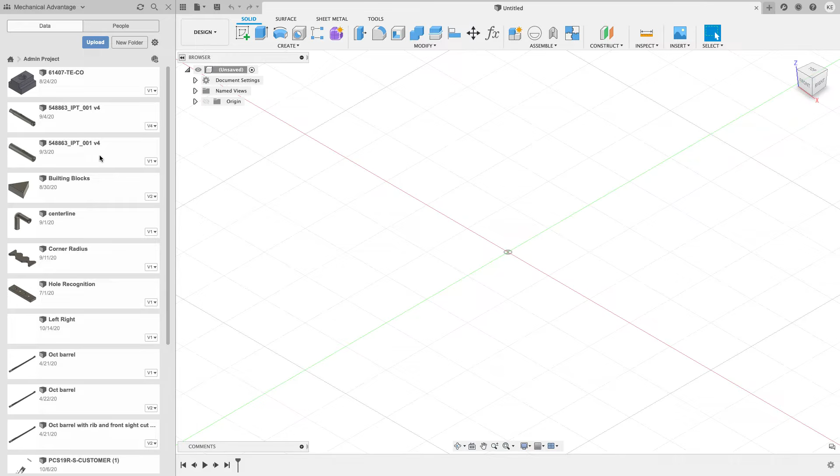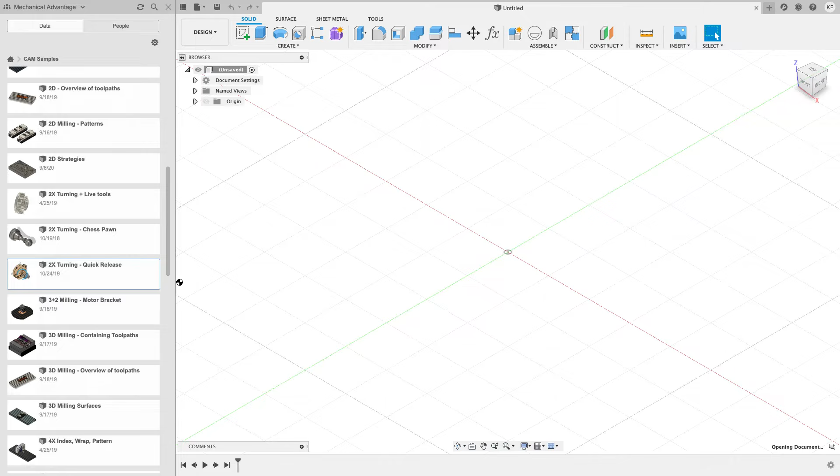To do this, we're going to use a tutorial file that Autodesk has supplied with Fusion. To get to that tutorial file, I'm currently in a project. I'll click on the Home button, scroll all the way down until I find the samples directory, and inside samples there's a CAM samples folder. I'll double click on that folder, scroll down a bit more until I find a file called 2x turning quick release, and either double click on it or right click and choose open. Fusion will go ahead and open that file for me.

Once I get the file open, I can close my data panel since I don't need it anymore. We open this up, we can see the part, we can see it set inside a chuck, and we're ready to go ahead and add some toolpaths.

Now this part already has a setup and toolpaths added to it. We're not going to use these. You can minimize them, or I'm just going to right click on this setup and delete it altogether.

Now you could also go up to file and choose save as, give this a name and choose what project you want it to go to so it saves to your directory. I'm going to hit cancel, and you'll note you can't hit the save button—this is currently read-only, so you can't change this file once you open it up.

Once you have your file saved to your location, we're ready to make a setup. From the setup panel, I'm going to choose the setup command, and our setup will pop up. If we look under operation type, we're set to milling, but we're going to do a turning part here, so I'll hit the drop down and choose turning or mill turn.

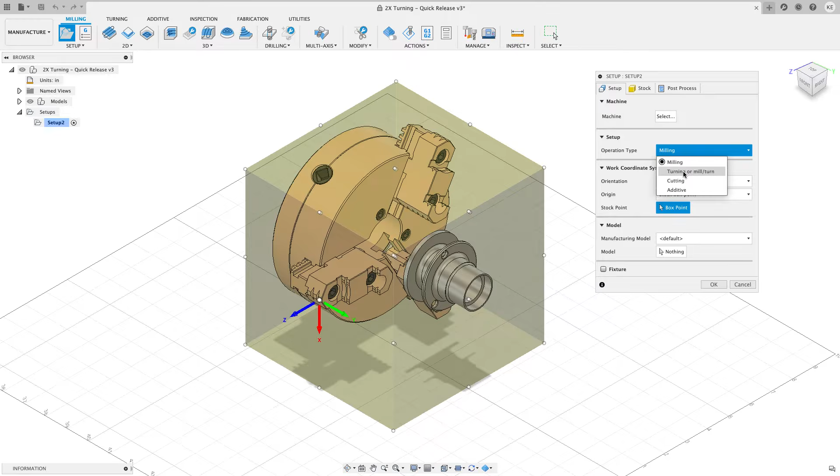When I do that, the axis shifts a little bit, but Fusion isn't quite sure where my center of rotation is going to be. It's looking for a Z axis, so I can click on any round face—I'll just go ahead and click on that face right there. It doesn't really matter which one you choose. Now you can see my Z axis is lined up with the axis of my part.

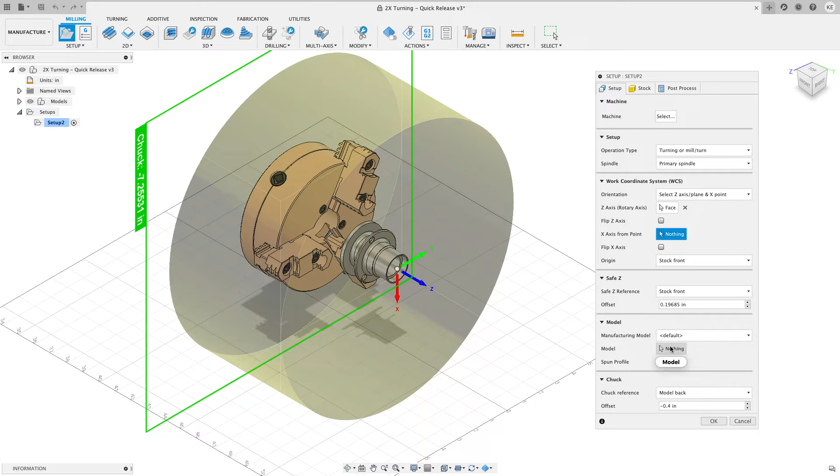I also have to tell Fusion which model it is that I want to machine in this case. So where it says model nothing, I'll just go ahead and click on the model itself, and that gets me oriented that way. Now I can see that I have the stock on my part, and I'm going to make a few more adjustments to it, but for the most part we're making some progress here.

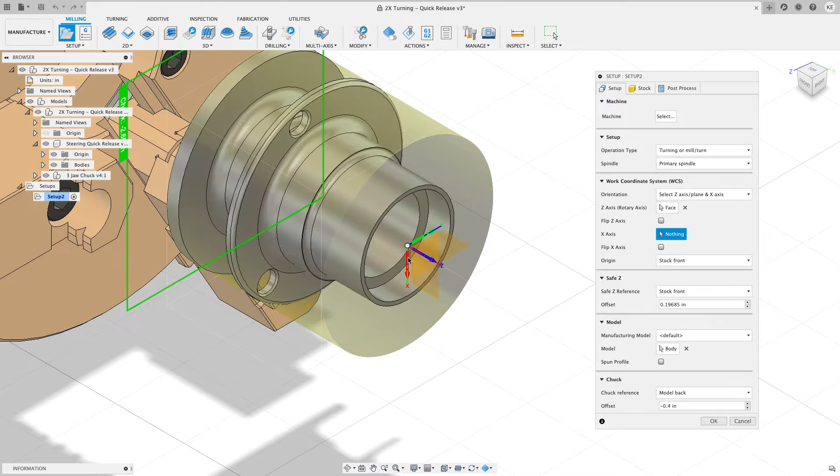I don't like the way this x-axis is facing. I want the x to face away from me, y to come up, and z to run down the center line of the part. To fix the x-axis, I'll expand out my models, my design, and then my steering quick release, and turn the origin on. Now I can go click on the base of the X arrow and click on this plane, and I have my x-axis now perpendicular to that plane, facing the way I want it to.

So I can turn my origin back off so I don't have to see that, and minimize this stuff one more time. I'm pretty happy with my outcome there. I'm going to go set my stock diameters now—I'll do a fixed size cylinder for this, and my stock diameter is going to be 2.75.

And the length for this is going to be 3.5 inches. So I'll type in 3.5. And when I look at this, Fusion puts some of that stock in front and some of it in the back. I really just want most of it to hang on to.

So what I could do is change my model position to offset from front, and I'm going to do an offset amount of 100 thousandths of an inch, or 0.1, so we can come back and face that off. And now you can see I've got more material behind it to be held onto, and not as much to face off in the front.

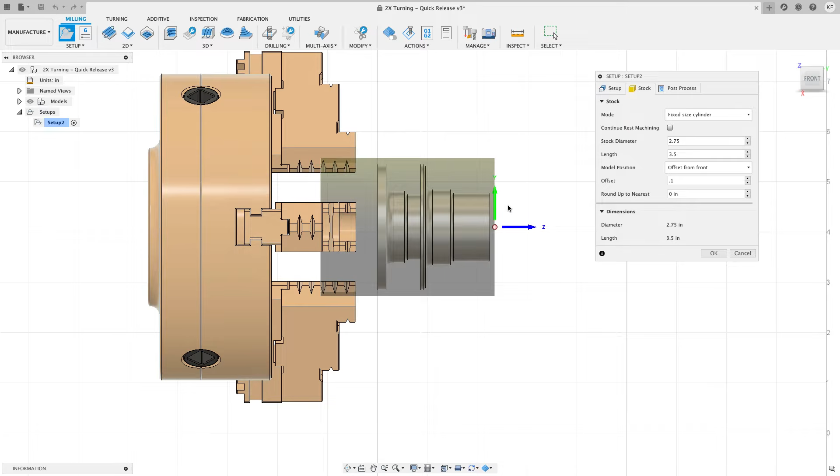And I should be good to go on my setup, and I'm going to go ahead and choose OK. So I've got my setup created. We're ready to go and start adding some toolpaths, and we're going to start by facing this part off.

I should also note that this tutorial is meant to help you get started using toolpaths inside of Fusion 360 when doing lathe parts. This isn't going to be a complete comprehensive deep dive into every option of every toolpath that I show in this. So I might dive into a few options here and there, but we're not going to cover every single option in every toolpath that we go through and look at.

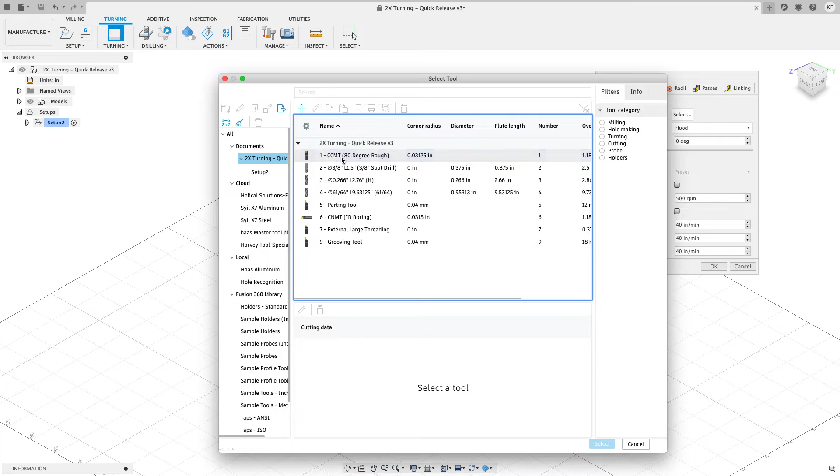So like I said, we're going to face this part. So I'm going to go to the turning menu and hit the drop down and choose face. And I'm going to go select a tool. Now this file, this 2x turning file, does have tools associated with it, and we're going to use these tools to start out with. So I'm going to start out by grabbing tool number 1, the CCMT 80 degree rougher.

I'm going to go ahead and select that, and then it may sound sort of funny, but every toolpath that I'm going to show you how to do inside of this, once I select the tool that I want to cut with, I'm just going to hit the OK button and see what I get.

So in this case, I get a facing toolpath, and if I simulate this, maybe we'll slow this down a touch, what we'll see is Fusion just goes and faces that front off of the part. And it took a 100 thousandths-inch cut off there, and maybe that's too much. So maybe what we could do is edit this.

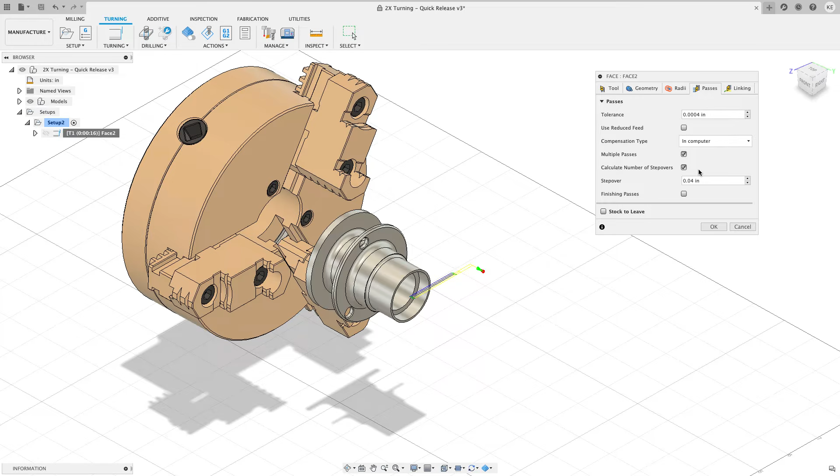We could go over to the Passes tab, and now I could turn on multiple passes, and I'm going to set my pass to be 50 thousandths or 0.05 per pass, and then hit OK. And let's see how that changed it. Now when I simulate it, again, we'll slow it down just a little bit. It's going to go through and take its first pass. It's going to come back, and it's going to do a second pass, and it cleans up to that green face.

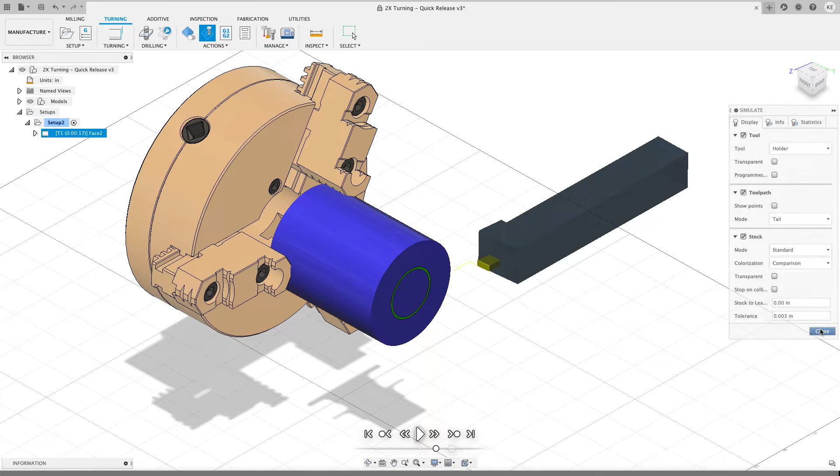I've got my simulation set to comparison. So anything that's blue is remaining stock, and anything that's green is finished stock. And we'll go ahead and close that. So that's our facing toolpath.

Now let's go and work on profiling the outside of this. We're going to do a roughing profile toolpath for that. So I'm going to go up to the turning menu and choose turning profile roughing. I'm going to go and select the tool. In this case, it's already going to use the one that I want. It's already pre-selected. And now I'm just going to choose OK and see what I get for toolpath.

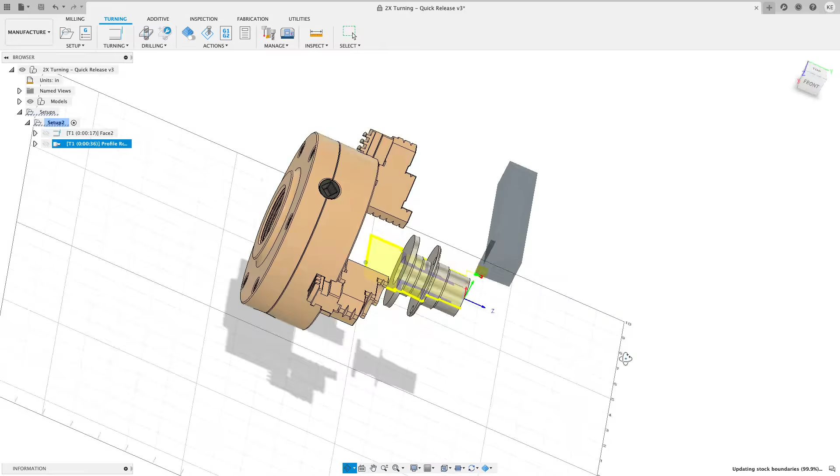So we'll look at this from the top view here, and we can see that we have some toolpaths going across this part. And we can kind of evaluate the toolpaths, see what it is that we like and what we don't like. And I can see a few things that I don't like.

I'd like this toolpath to cut farther past the back, so when I part this off, I don't have to go through as much material. I also don't like how it's diving down here. And maybe we'd want to change the amount of step down we do here, things like that, make it extend out farther. So let's go look at some of those different options.

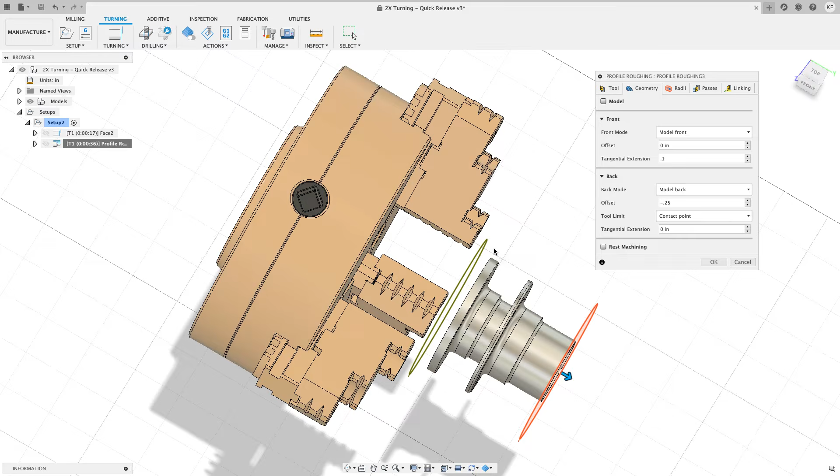I'm going to edit this toolpath, and one of the first things I want to do is on the geometry, I want to extend it where it goes and cuts. So from the front, I'm going to give it a 100 thousandths of an inch tangential extension. And on the model back, I'm going to give it an offset here. So I'm going to say minus 0.25, and there you can see that preview is showing me where it's going to cut to, and I'll hit OK and see what I get.

And now when we look at this toolpath, it starts cutting out farther, and it's cutting farther past the back, still away from my jaws, but you can see how it's diving in both of these areas. So maybe we could go and look at how we could make it stop diving in like that.

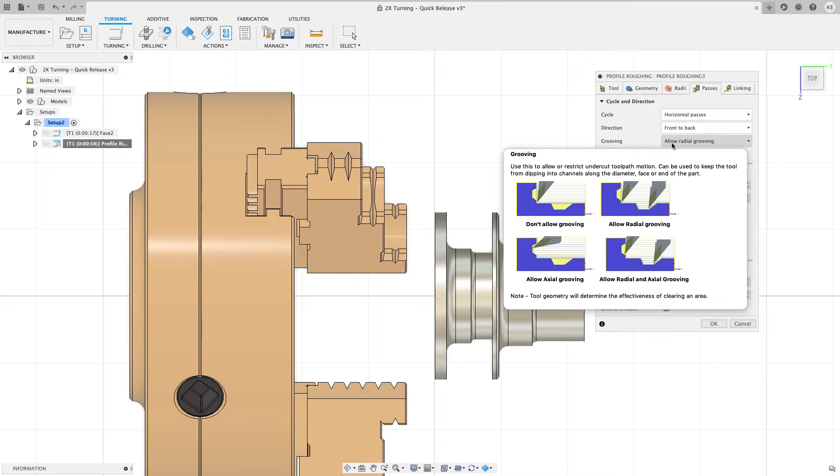I'm going to edit this toolpath, and that's going to be controlled on the Passes tab, and it's going to be something called grooving. So right now it's allowed to groove radially. If you look at the tooltip here, I think it's pretty self-explanatory. I'm going to hit the drop down and say don't allow grooving. And now when I hit OK, Fusion's just going to go and do straight toolpaths across. We're cutting past the back, getting pretty much what I want right here.

So maybe one other change I might want to make is on the Passes tab. Maybe I want this to do a deeper step down per pass. So it's currently 50 thousandths of an inch. Let's make it 150 thousandths of an inch just so you can see the difference, and we'll hit OK. And now you can see that we have fewer roughing passes going across there. So you can control the step down of your tool that way. So I've got that taken care of.

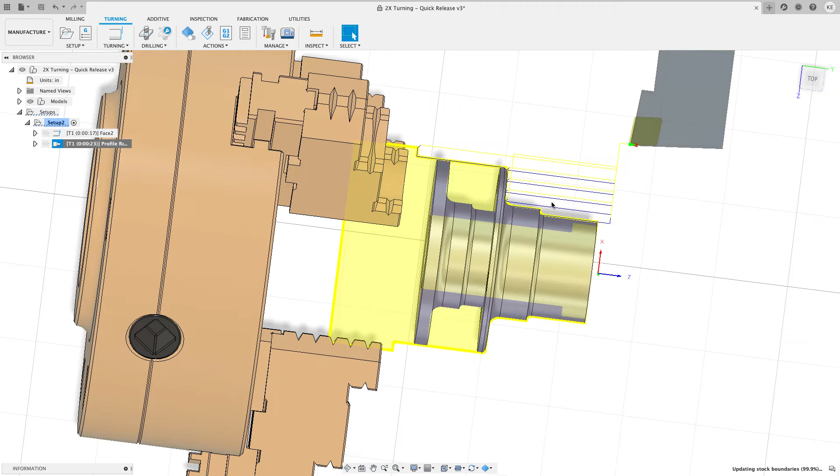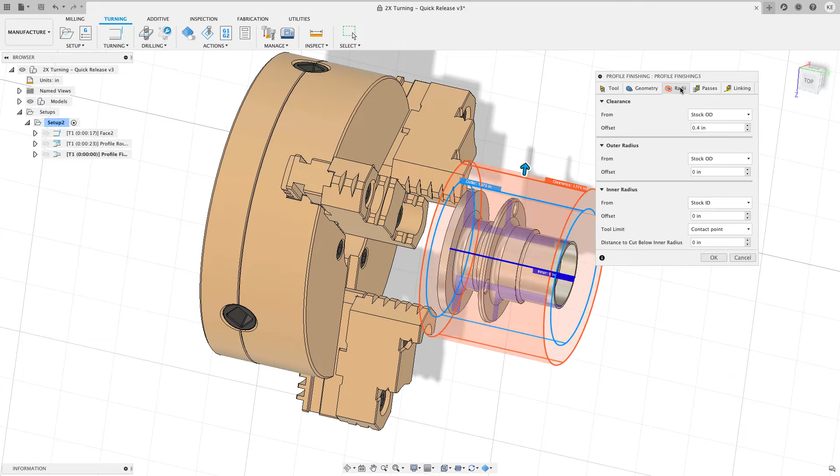Now what I'd like to do is a finishing toolpath across here, a finishing profile. So I could go to the turning menu and say turning profile finishing, but I've got a lot of the work done already. So I'm going to right click on this toolpath and say create a derived operation, turning, and now I'm going to choose that turning profile finishing. Go ahead and select that, and I can change any options that I might want to change. Everything should be pretty identical with the exception that it's not going to do roughing passes anymore. So I'll hit OK, and I get the toolpath that I want.

However, we do see that we get a little warning here, and I've seen people work an awful long time to try to get rid of this warning symbol. And this isn't anything that you have to fix, so I'm going to go ahead and click on it and see what it says. It says a lead out has been modified due to a gouge with the remaining stock. So Fusion is just letting us know, hey, you had something set wrong, and it fixed it for you. I don't need to change anything here.

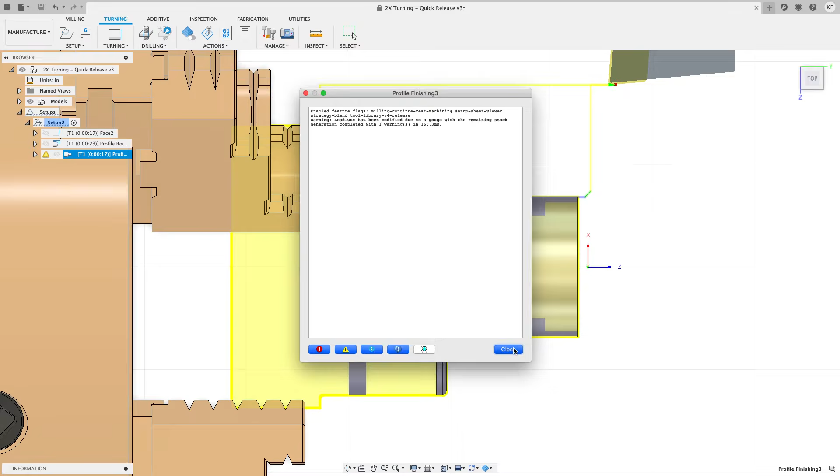So if I were to edit this, I could go to my linking tab. I could change my lead out exit, I'm sorry, make it different. I don't want it to be the same as the lead in. And now when I hit OK, you see that I get a straight up a 45 out, and I don't get the little soft warning symbol anymore. So now I've got that taken care of.

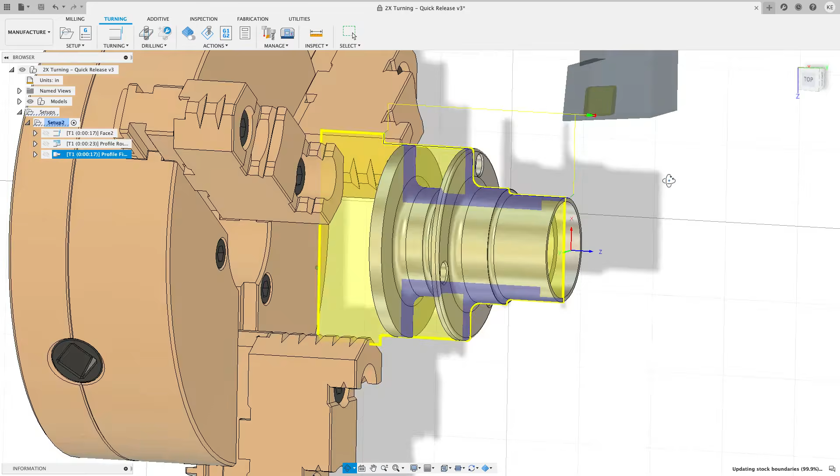What I'd like to do next is go through here and groove out between these two faces. I want to get rid of this material in there. So let's take a look at the toolpath that we could use to get rid of that particular area on our part. And that toolpath is going to be called groove. So I'm going to go to the turning drop down and choose turning groove. And I want to go select a tool. I'm going to select tool number 9, the grooving tool. And like all the rest of the tools, I'm just going to hit OK. So once I get that tool selected, I'll hit OK and see what I get for a result.

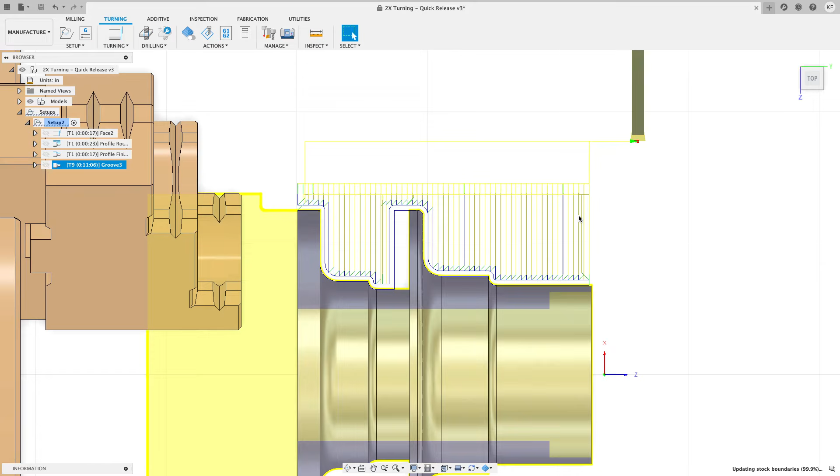And you can see that I get a tool path, but it's not exactly what I want. It's cutting way more material than what I want it to do. I only needed to go between these two faces right here. So let's look at how we can confine this tool path a little bit. I'm going to edit this.

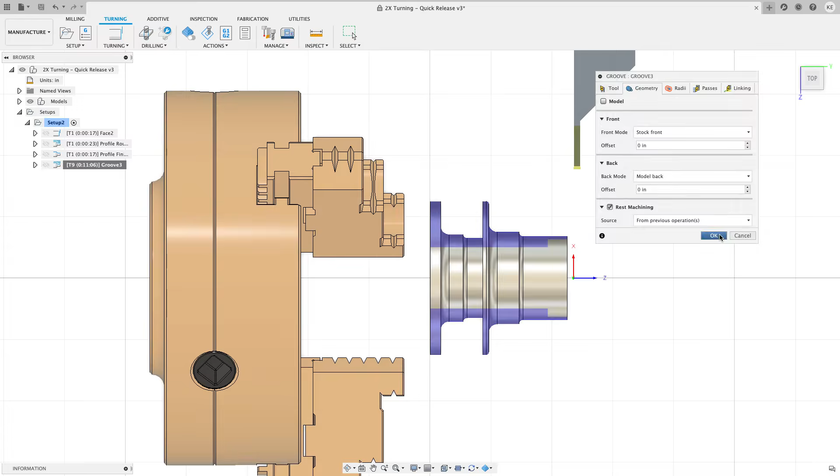And the first thing I'm going to do is go to the geometry tab, and I'm going to turn on the rest machining option. Rest machining means machine the rest of the stock that's left over after the previous operations. So after the profile finishing operation, what's left? If I hit OK, now you'll see that Fusion does a much better job of limiting the toolpath, but it's still cutting a little bit more than I'd like it to cut.

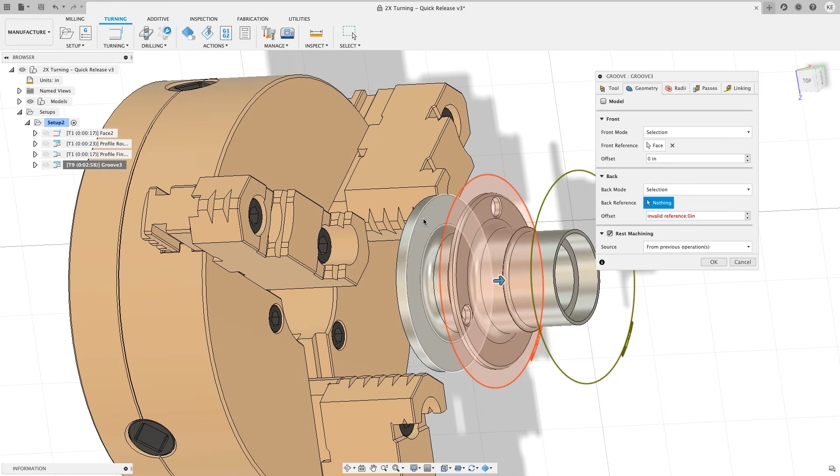So we can further refine this toolpath by editing the groove. And on the geometry, I'm going to choose a different front and back. So for the front, I'm going to choose a selection. I'm going to select that face. And for the back, I'm going to choose another selection, and I'm going to choose that face right there. So now we're going to limit between those two. And when I hit OK, you'll see that the toolpath now does a much better job of staying between those faces. So let's look at a couple other little things that we can change with the grooving toolpath.

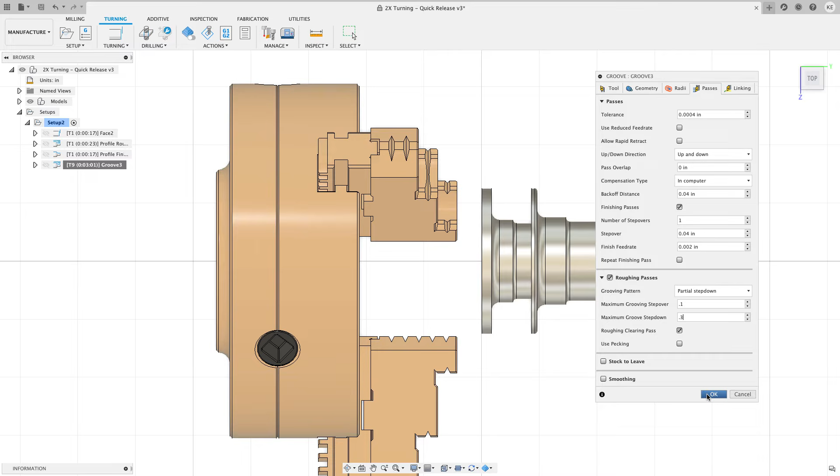So I'm going to edit this, and I'm going to go to the passes tab. And what I want to do is, instead of doing a full step down, I'm going to choose a partial step down. And so I'm going to set my step over amount here to be 100 thousandths of an inch or 0.1. And I'm going to set my maximum grooving step down to be 0.3 or 300 thousandths. And now I can hit OK. And what we should see is fewer tool paths, and it doesn't step down quite as far.

So let's see what that looks like in the simulation. I'll simulate that starting with the grooving tool path, and let's slow this down just a little bit. And so it's going to come down here. It's going to do that 300 thousandths step down and go across and clean this up. This toolpath is going to do a clearing toolpath before it gets done finishing, before it cleans itself up.

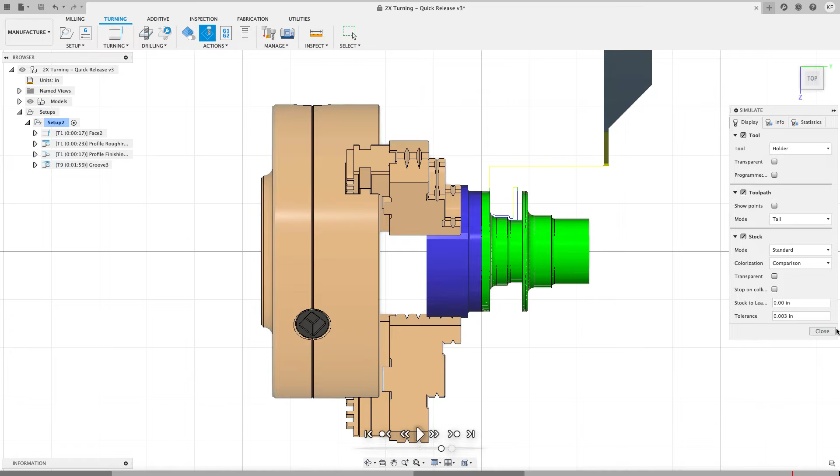Now, one other change I might want to make is on the passes, I'm leaving 40 thousandths of an inch to clean up on the walls. I'm gonna change that to a much smaller amount. So I'm gonna say 0.005 to clean up. So I'll go ahead and say 0.005. That gives me less material to clean up.

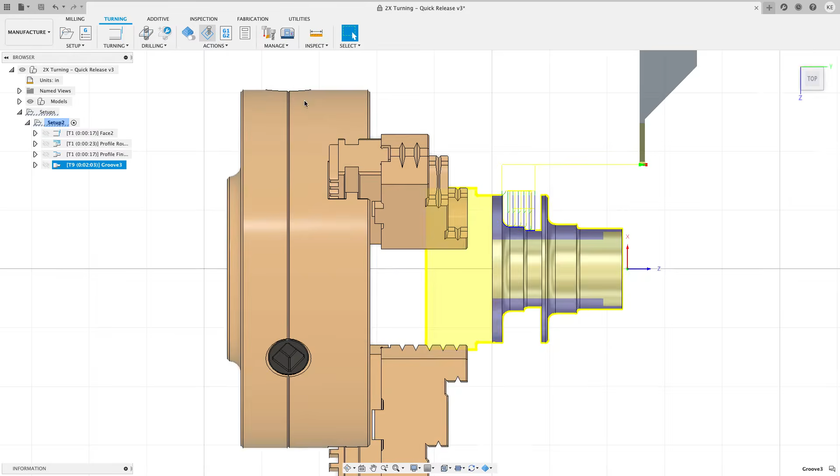Now, let me simulate this one more time without the stock on. And I'll slow this down a little bit, and I want to jump forward just a little bit more. Let me slow that down one more time. Some of the collisions that we're going to see on this aren't really going to be there. So I'm going to jump back here and hit play.

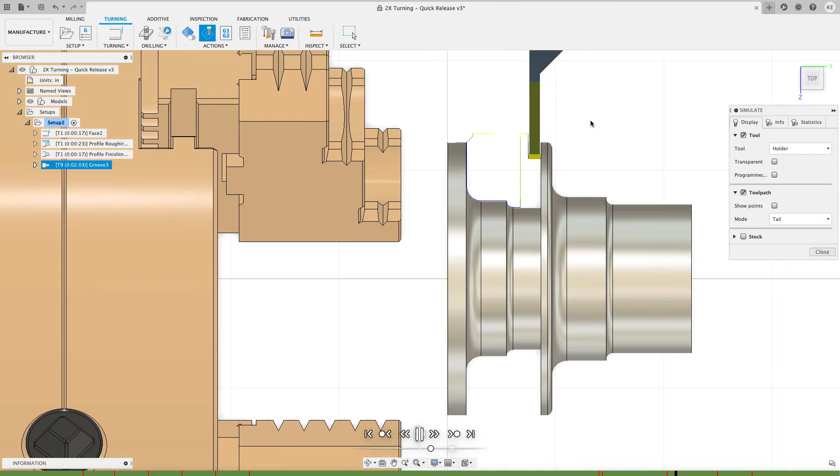Now what you're going to see is we're doing the final cleanup pass here, I think. In a second, it's going to come over here. It's doing the clearing pass. It's pushing down and coming across. And now it's going to come and get ready to do the cleanup pass on here, the finishing pass. Now notice it pushes the tool down, it slides across, and it's going to pull the insert back up the wall, which often isn't desirable. So let's look at how we can maybe fix that.

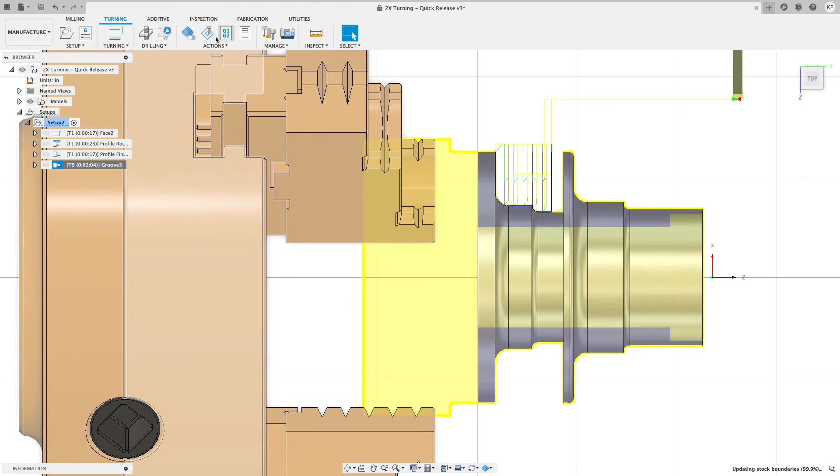If I were to edit this tool path, I'm going to go to the passes tab, and now this tool is allowed to go up and down. I'm going to change the option so it goes only down. So we make that change. Let's simulate that one more time. Try to jump a little bit farther ahead. Slow it down one more time and hit play. Again, we're going to see that clearing pass first.

And then we're going to see the finishing tool path come up. So now this time what will happen is the tool is going to be pushed down. It's going to go roughly halfway across. So it's pushing the tool down. It's going to go into its finishing tool path. And then it's going to go to the other side and repeat the process.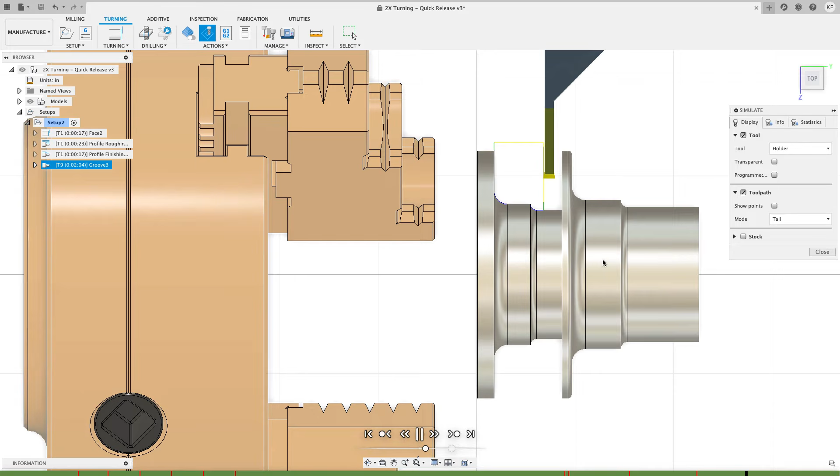But instead of pulling the insert up, it's going to push the tool down and then meet where it left off. So there it's pushing the tool down the wall. It's going to slide across. This is the finishing tool path. Go across that little fillet, meet where the last tool path was, and now we're done with the finishing tool path on the groove. So we've got the outside groove taken care of.

And now we just have to worry about taking care of the inside bore and parting this part off. So let's go look at how we can do that. Before I do my inside profiling, I want to drill that hole out first. So on the drilling panel, we're going to grab the drill. And if I go to the geometry tab, I can hover my mouse over that diameter and see that diameter is roughly an inch.

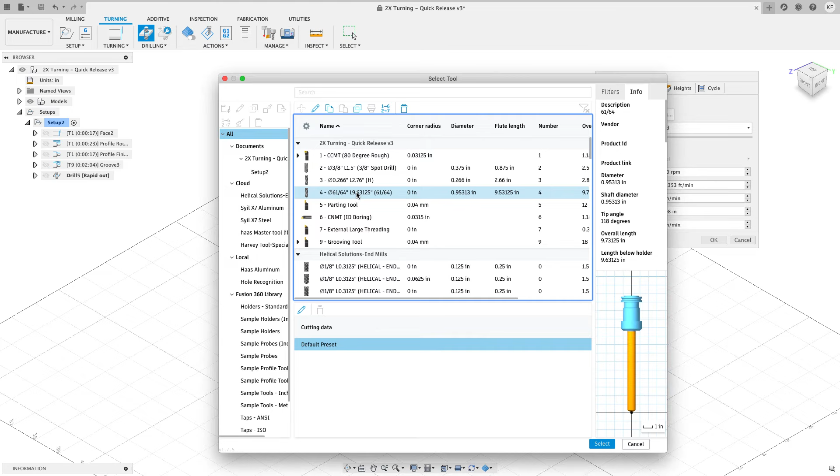And so now I can go back to my tool tab and let's go select a tool. Again, in this file is a drill. It's a 61/64 drill, so almost an inch. So that'll work. So we'll select that guy. And then for the geometry, I'm going to click on that hole face. Now, right now, what it would do is it would wrap it through the front of the part and start drilling the hole right there.

So we want to make a couple changes to it. I'm going to turn on auto merge hole segments, which is going to recognize that that other part of the bore is also part of the hole. So that works out. And then I'm going to go to the heights tab and say that I want to drill the tip through the bottom, which is going to bring the shoulder down. And I want to go plenty past the bottom of this part. So I'm going to say 0.3, 300 thousandths past to get drilled through there, so that when I come back, I don't have to worry about my tool bottoming out or anything when I do my inside profiling.

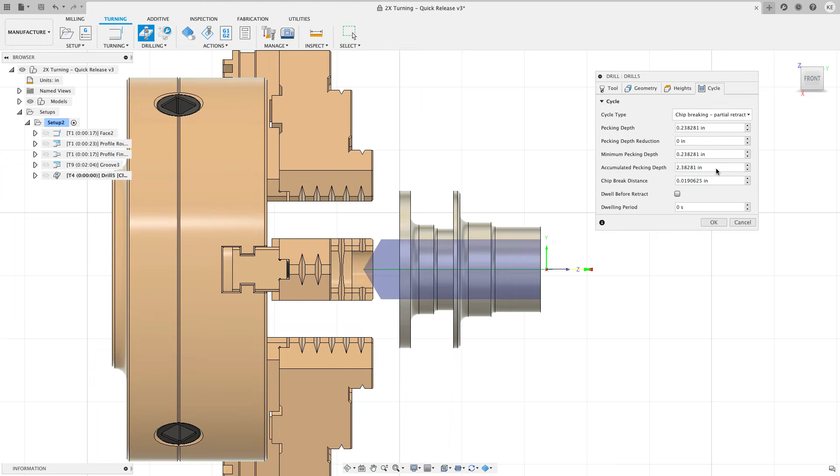And then on the cycle tab, I think I'll choose to do chip breaking partial retract, and I'll do an accumulated pecking depth of 0.75 inches. So once the tool gets in 3/4 of an inch, it'll pull all the way back out to get rid of the chips and go back in and start pecking one more time. I'll hit OK. And now we have the drilling toolpath that removes the majority of the material out of this bore. So what I want to do first is rough out the material that's left right there.

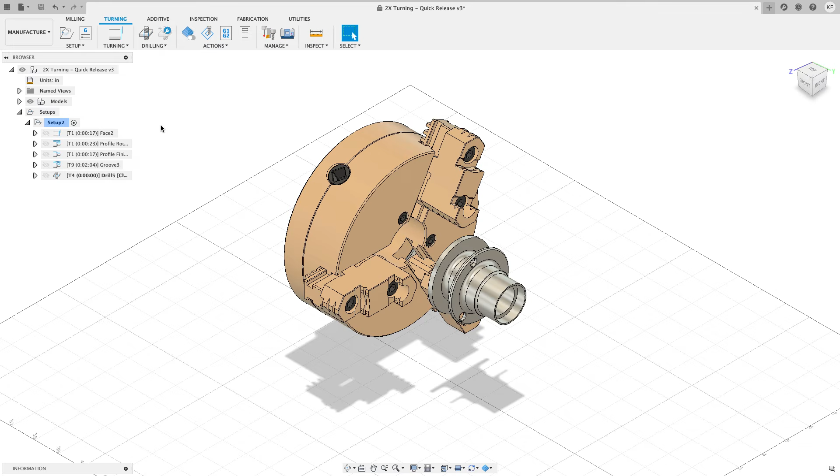And to do that, I'm going to choose turning and choose turning profile roughing. And I'm going to go grab a tool out of this part, and we're going to see that there is an ID boring tool. Tool number 6 is what we're going to run with. Now when I choose tool number 6, it's set up to default me to be inside profiling. When you're working on the inside of a part like this, you need to make sure your turning mode is inside profiling instead of outside profiling.

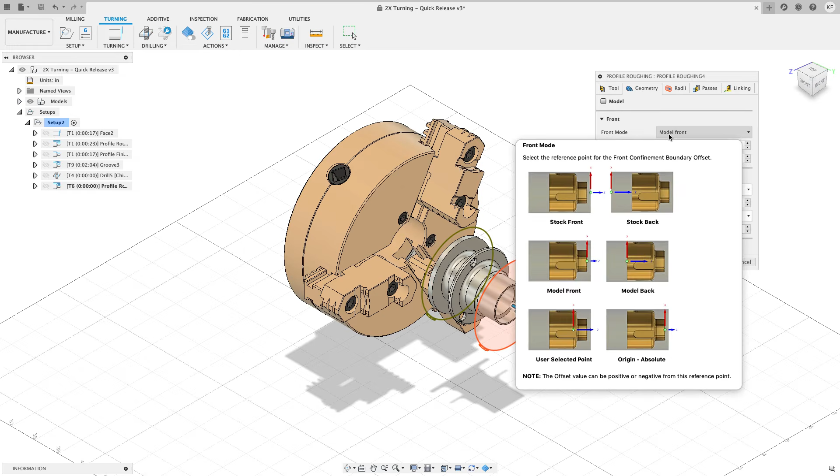On the geometry, I'm going to choose to cut from model front, and I'm going to cut to a selection. I want to go down to this depth right there. I'm also going to do 100 thousandths of an inch tangential extension on the front of this again as well. So we're going to add that value in there. And then now we're going to go look at the radii.

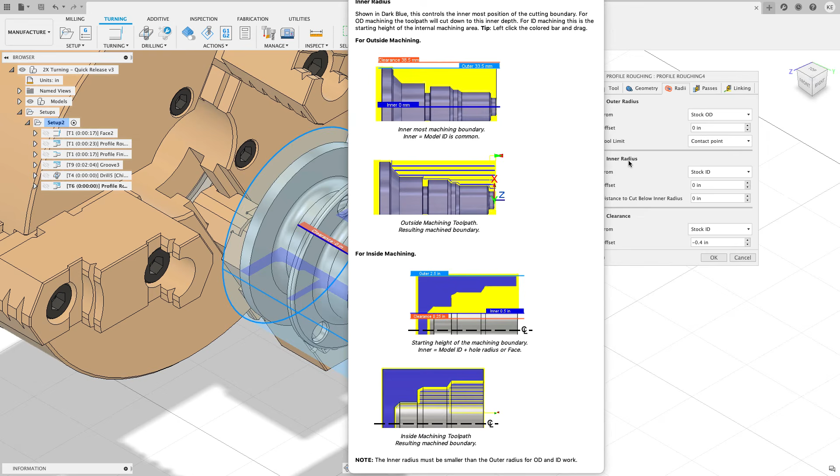This is sort of the first time where this matters a lot, what we're doing. And this is where the tool is going to lead in, is on the clearance. It's going to start cutting from the inner radius, and it's going to cut out to the outer radius. So I'm going to change this to be a selection, and I'm going to choose on that face right there. And I'm just going to give it a value of, say, -0.1. That should be enough for what we want to do.

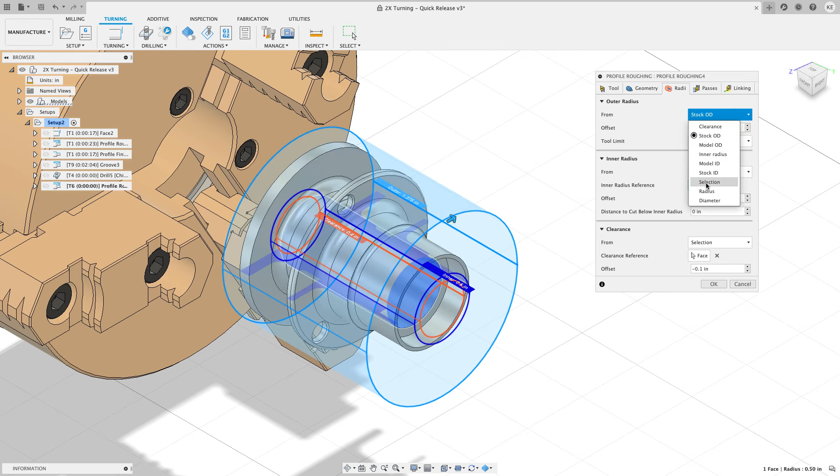I want to start cutting from this selection, and cut out to this selection. So those are my three things to click on. I'll choose OK, and now I should get a toolpath that goes and roughs out the material on that part. I want to make sure I left a little material on the wall, so I'll go to the passes, and it left a bit of material to come back and clean up. So I'm good on my roughing toolpath for this.

What I want to do now is one more toolpath, so I'm going to say turning profile finishing. It's going to be the same tool for my geometry. This time I'm going to go from model front to model back. On my front, I'm going to do my 100 thousandths of an inch tangential extension.

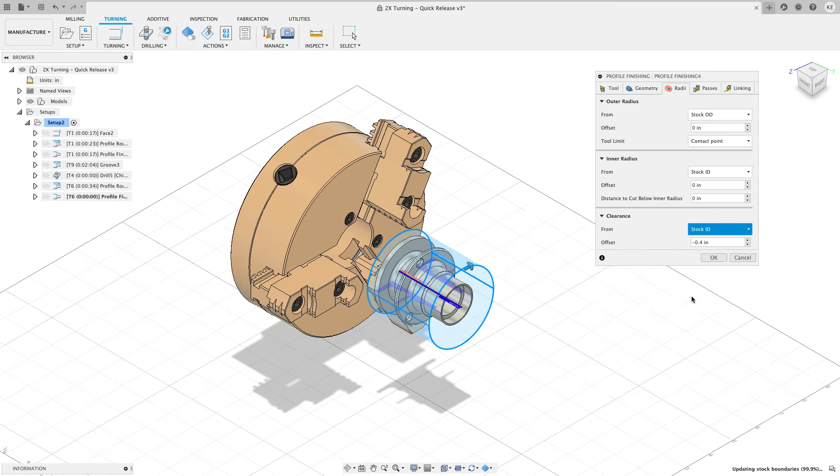Now on my radii, I'm going to do this one more time. I'm going to say from a selection, and click on that face. I'll do an offset of -0.1, 100 thousandths of an inch. I want to cut the same way from this selection, and this time, because I want that to be included, I'm going to say -0.05. Then I'll cut out to this selection. So those are my three values that I'm going to choose.

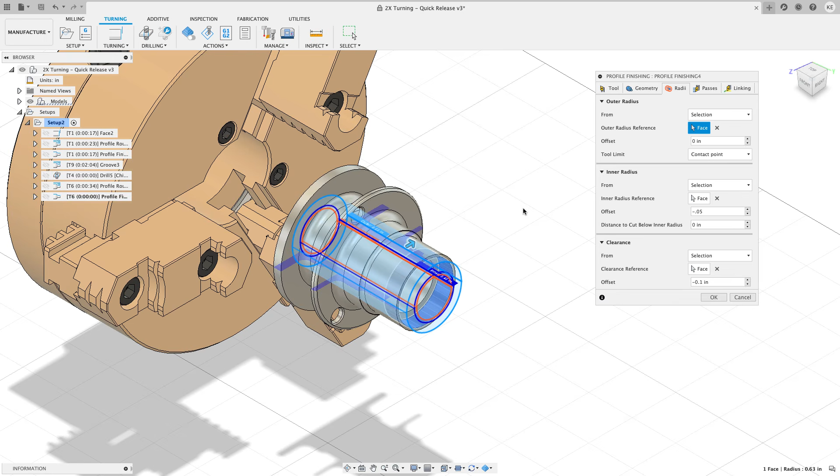We'll hit OK, and there we get a profiling toolpath that goes and cleans up the material that was left, that the drill didn't do, and came across.

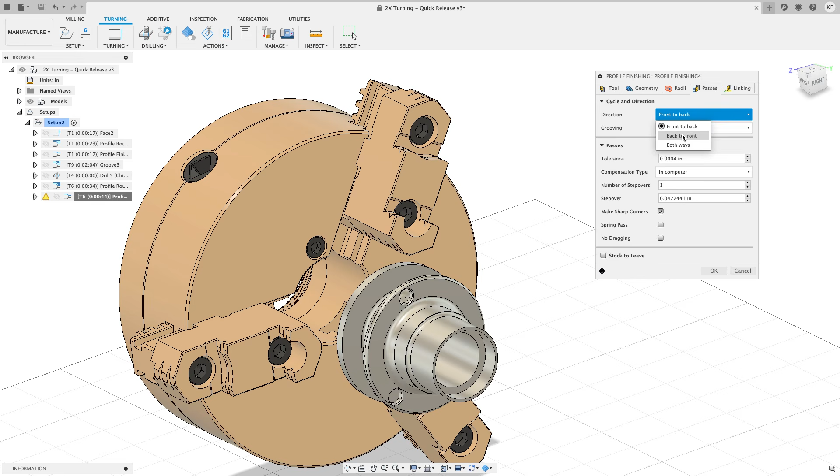To make one small change to this, I'm going to edit it, and on the passes tab, I'll change the direction from front to back, instead to back to front, then hit OK. Now if I were to simulate just this toolpath without the stock on, the tool is going to go inside of the bore, drag across from back to front, and clean up the inside of this. So I've got that bore taken care of now.

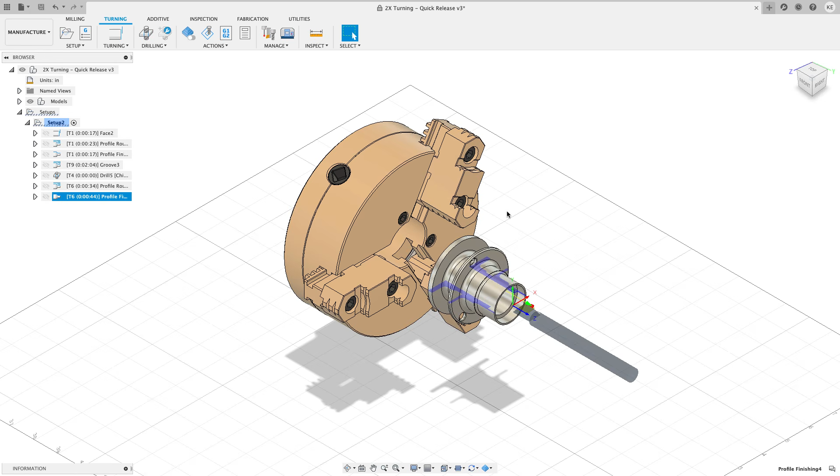So the majority of the work on this part is done. I only have one last thing to do, and that's to part this part off. So from the turning menu, I'm going to choose turning part.

Fusion is going to grab a grooving toolpath if you've used one. I think there's a better parting tool in here, so we're going to grab tool number 5 for this. I'll go ahead and select that and then just hit OK.

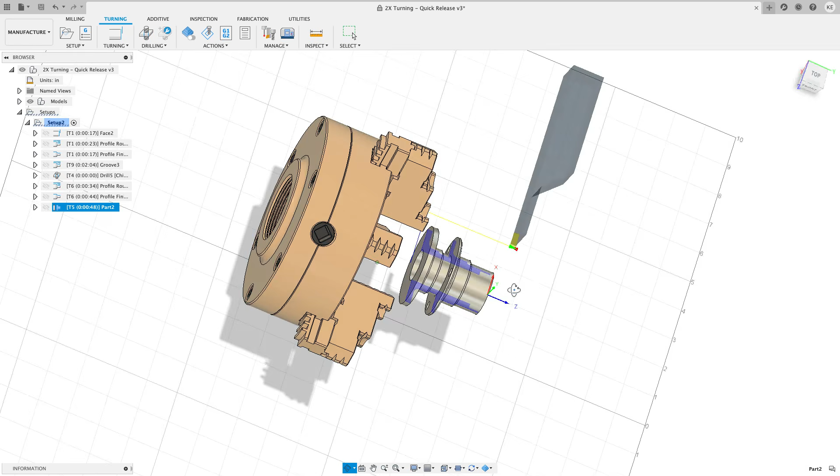What we'll see is Fusion goes and parts this part off, but it's cutting way more material than it needs to. It's starting outside of the stock and finishing at the center line, and we don't need it to go that far. So I'm going to edit this, and on my geometry, everything is okay there.

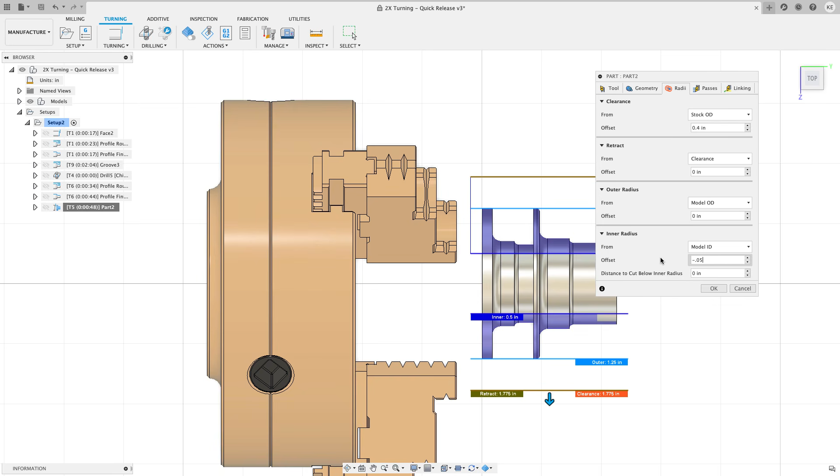But on the radii, we can say the outer radius is going to be the model OD, and the inner radius is going to be the model ID. Maybe we can give it a little bit of an offset, so minus 0.05 or minus 0.02 should be enough. We'll go ahead and do that and hit OK.

And now we're not cutting nearly as far when we come down with this part. So it's not going towards the center line nearly as much.

So if I come back to my setup, I'm going to go ahead and simulate this. I'm going to turn my stock on. I have tail set as my option, so we're going to face this part off.

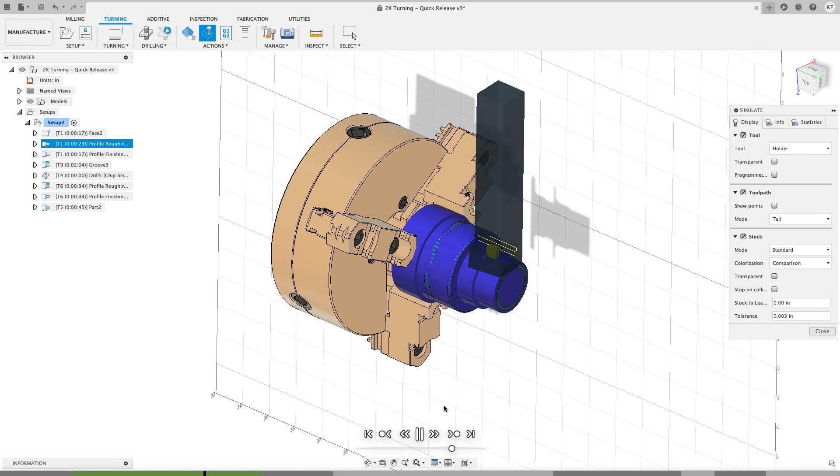Now we do our roughing profiling. It comes and does a finish profile. It grooves out the area between those two flanges. It does our drill, roughs our bore, cleans it up, and parts it off. And there we have a finished part that's ready to post out.